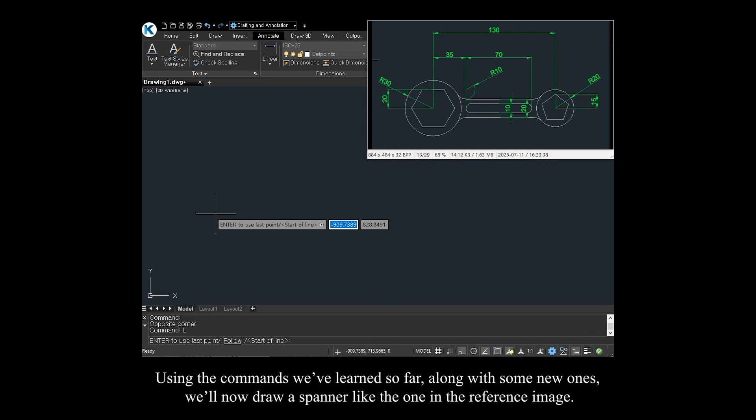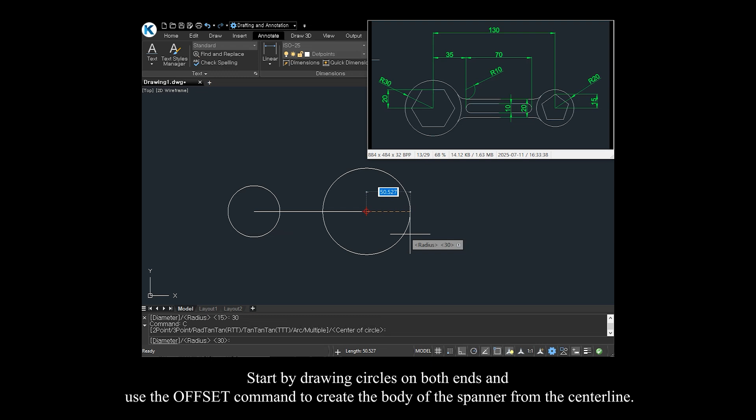Using the commands we've learned so far, along with some new ones, we'll now draw a spanner like the one in the reference image. Start by drawing circles on both ends and use the offset command to create the body of the spanner from the center line.

Next, use the fillet command to connect the body curves and tail ends smoothly. To draw a polygon, first create a circle with the correct dimensions.

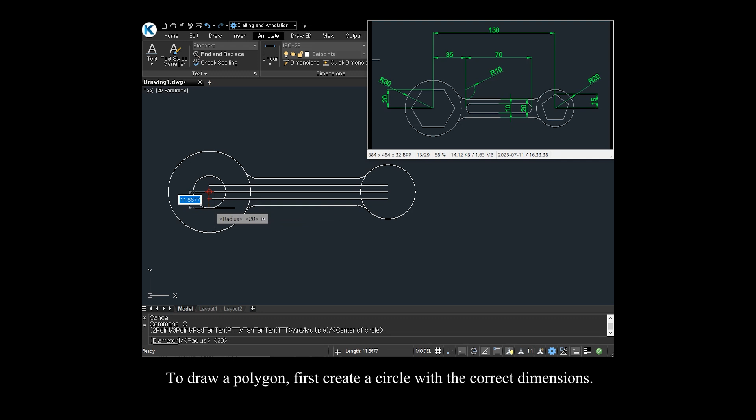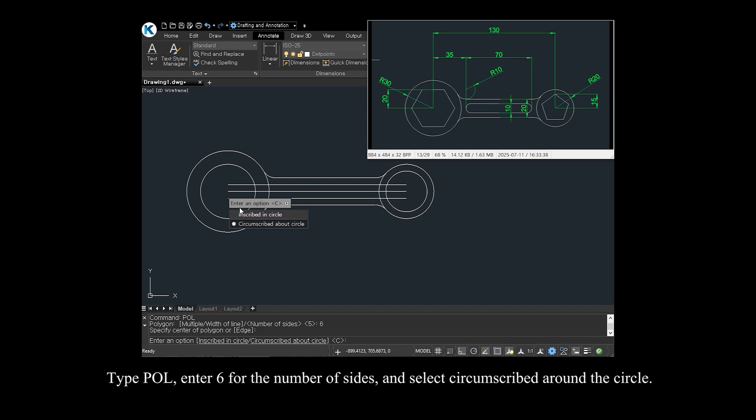We'll create a hexagon for the spanner head using the polygon command. Type pol, enter 6 for the number of sides, and select circumscribed around the circle. For the other side, type pol, enter 5, and select inscribed in circle to draw a pentagon.

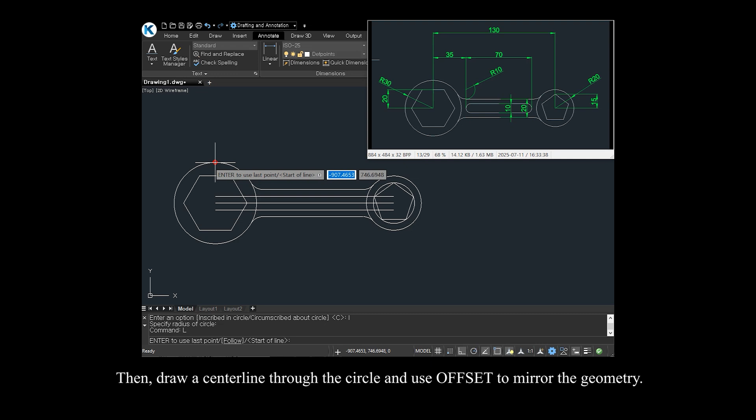Then, draw a center line through the circle and use offset to mirror the geometry. To match the drawing exactly, use the fillet command again, enter a radius value, and clean up any unnecessary lines.

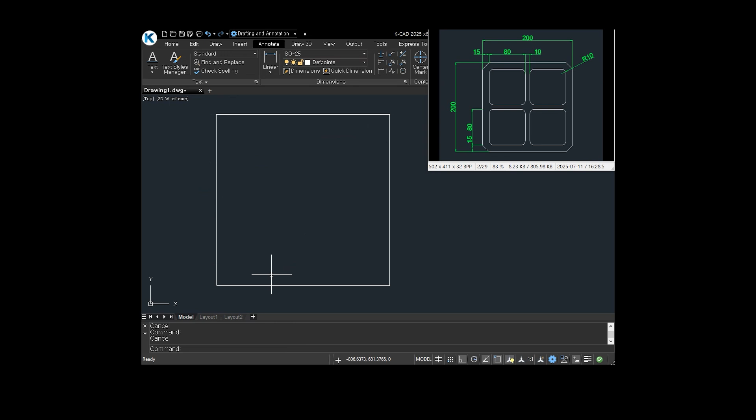To match the drawing on the right side, start by drawing a rectangle using the line command. Use the offset command to create spacing between lines.

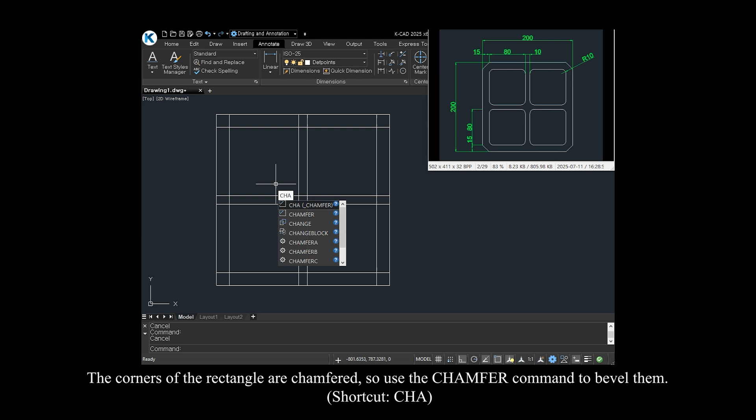The corners of the rectangle are chamfered, so use the CHAMFER command to bevel them. Select the distance option, and enter X and Y values for the chamfer. Just like with fillet, select two lines to apply the chamfer.

For the inside corners, use the fillet command with a radius value, and clean up the drawing with the trim command.